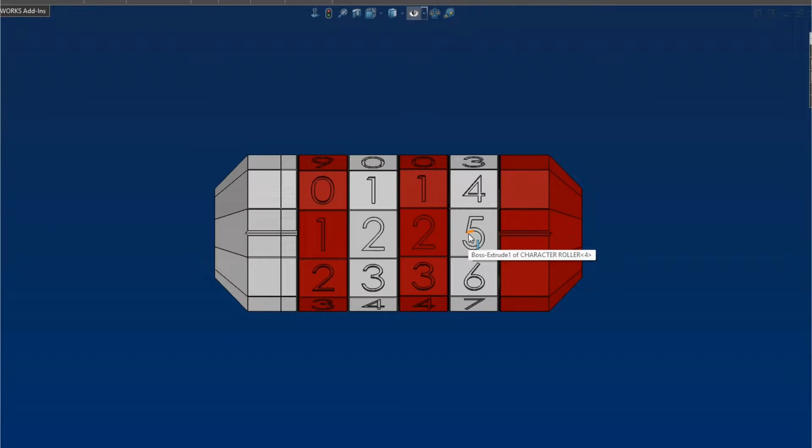In this video, we're going to go through how this thing works, how to set it up on your build plate, and then how to assemble it so you can give it as a gift this year. This is the Cryptex. It's a combination lock with a tube to hide some kind of treasure or valuables.

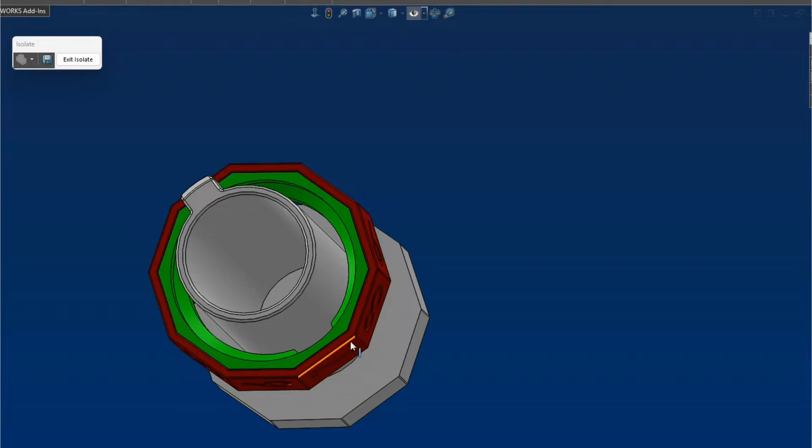So we've got this guy that is the treasure tube. So whatever you're storing in here goes inside of this hole. And then this is held in by these 4 dials. And the dials work like this. Inside of the dial is a lock ring, and the lock ring has a notch in it, and that's aligned with a number. Now, when the notch is positioned correctly, it allows this rib on the treasure tube to pass

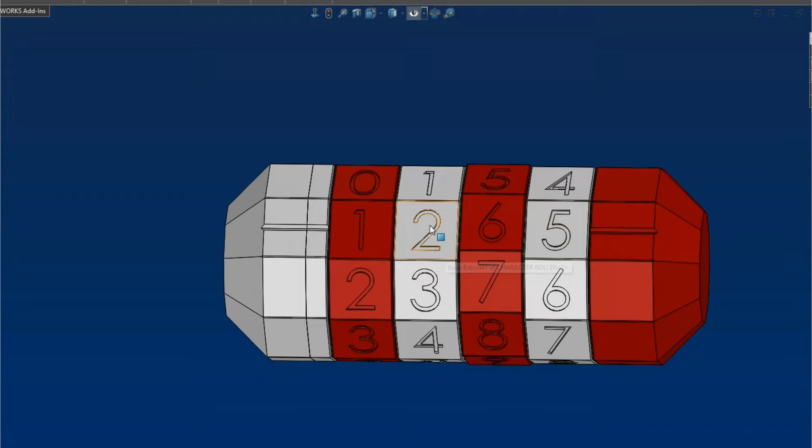through. When you get all 4 of the numbers in the right place, you've got a path for this thing to pull out. And if even one of them's out of place, then you're going to run into this wall, and this is going to collide, and you won't be able to take the tube out. So there's 4 of them. Each one has a lock ring in it. You can set the combination yourself. The notch is adjustable, so you pop the lock ring out and align it with the numbers you want. Line them up like this for your code.

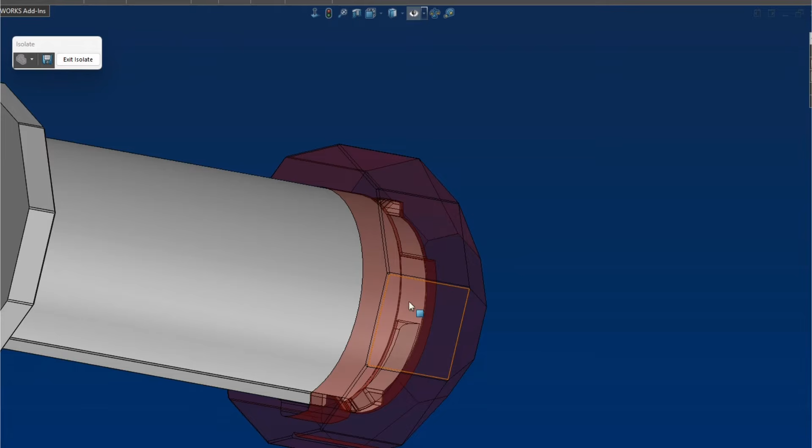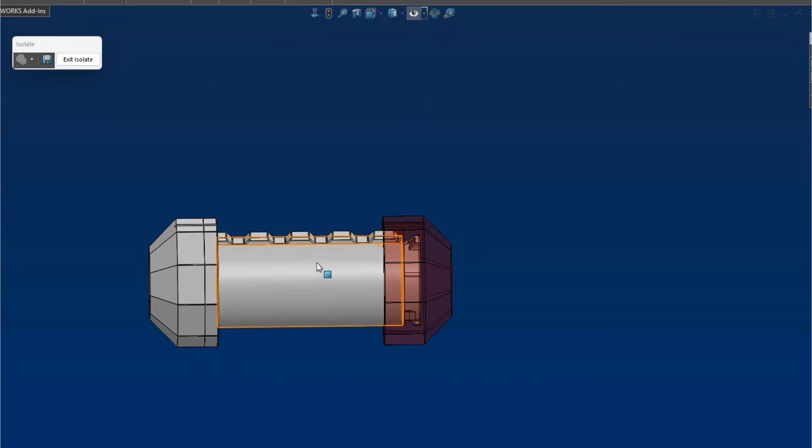Inside of it, to hold the end on, there's a twist lock feature. Now, this is one of my favorite ways to connect 2 things, but these 2 tabs on the white tube go in through 2 slots, and then they twist about 90 degrees and lock into place. And then if we bring the treasure tube in, we can see that when the treasure tube is inserted, this can't be turned because this rib goes right into this notch. So it's only when the treasure tube is removed that you can disassemble it. And that gives you the security to know that the only way to open this thing is to get the right combination. This is how your print bed should look.

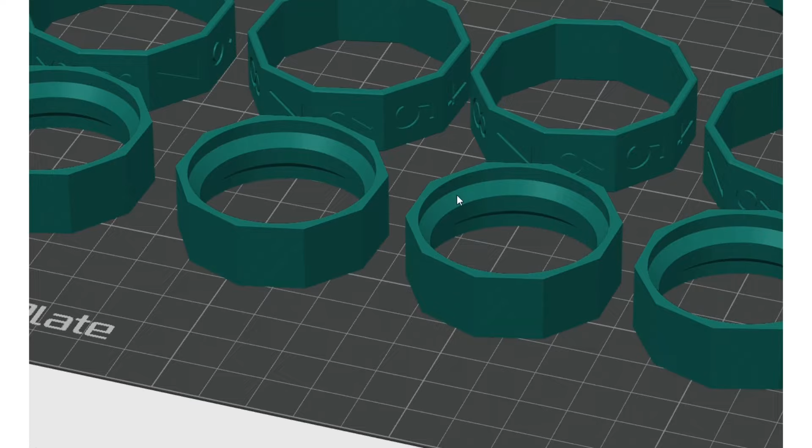We need 4 of the number rollers, 4 of the lock rings, then 1 end cap, 1 treasure tube, and 1 roller tube. Now we want to set them up like this on the bed because this will allow us to print without support. These lock rings all have a 45-degree angle on them so that we can print that as an overhang. We don't need support underneath it. The numbers print just fine on the side. They're not very deep, and they come out very legible for me.

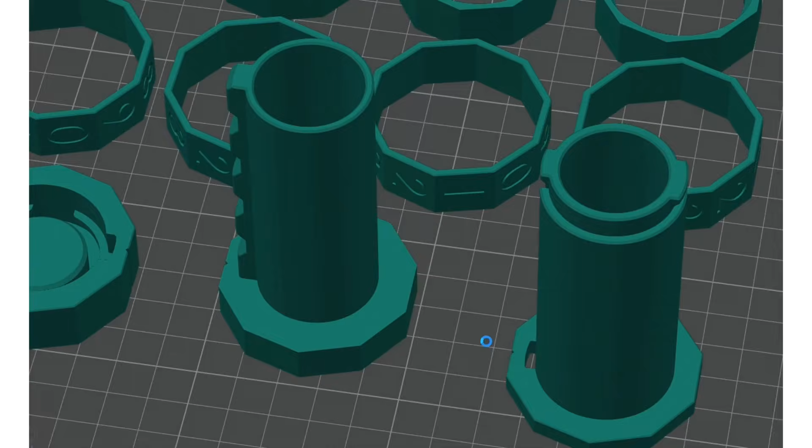The end cap, again, is made with all 45-degree angles so that we can print the overhangs and not need support down inside of there. Same thing on the treasure tube. All of these notches are cut with 45-degree angles so that they can be printed as overhangs, along with the bottom gem shape, I guess. And then, once again, taking advantage of overhangs, we can print this piece without support as long as we arrange it flange down. So these are the parts that you're going to want to print, and you want to set them up like this so that we can print really nice parts without any nasty support interface surfaces.

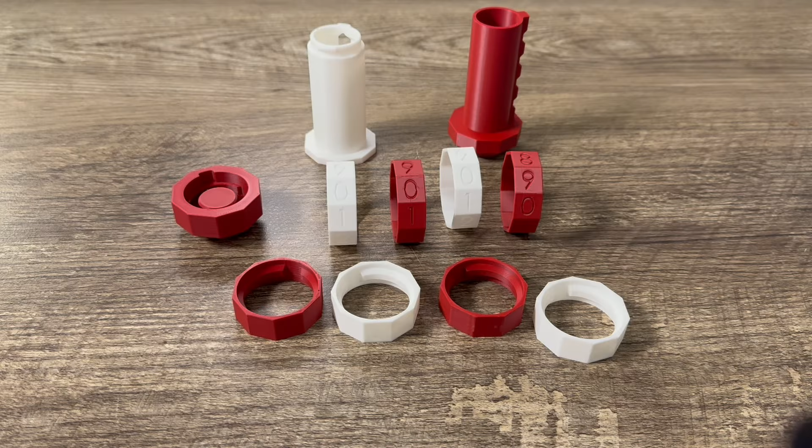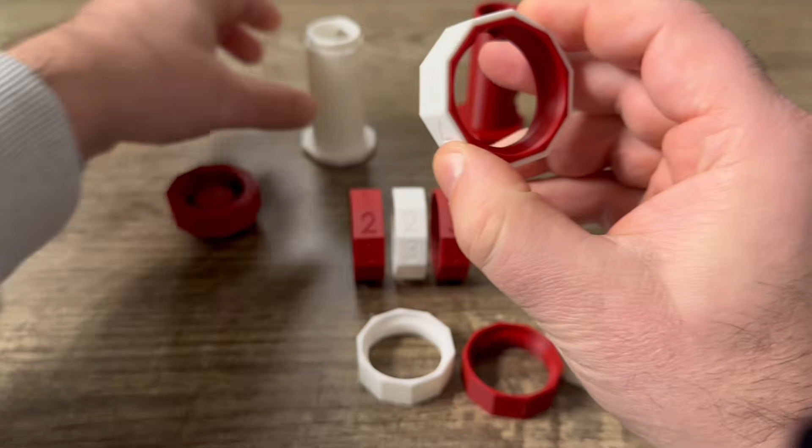Here are the parts we needed to print. We need to first come up with the combination for our Cryptex. So we're going to set it to 1, 2, 2, 5. Now, the colors don't matter. You set this up how you want. The number needs to line up with the notch. So we're going to do the 1 with this notch, push them together till they're all the way down, and then drop them over this piece. And then the 2.

It's important to make sure that your numbers are all right side up as you do this. This is another 2, and then a 5. So now, we're going to find this line. And then there's a line on this. And we're going to line them up. You've got to twist this towards you, and then it'll twist and snap into place. So this is the line where we line up our code.

So 1, 2, 2, 5. And then we put our treasure tube in like that. And just mix these up, and it doesn't come apart. This treasure tube actually has a spot on it that keeps the end from twisting off, so you can't just disassemble it. So this part goes right into here, and that's why you can't just take this off without the combination.

So when it's apart, you can disassemble it, snap this in place, but when we get into here, now it won't twist. So that wraps up the Cryptex.